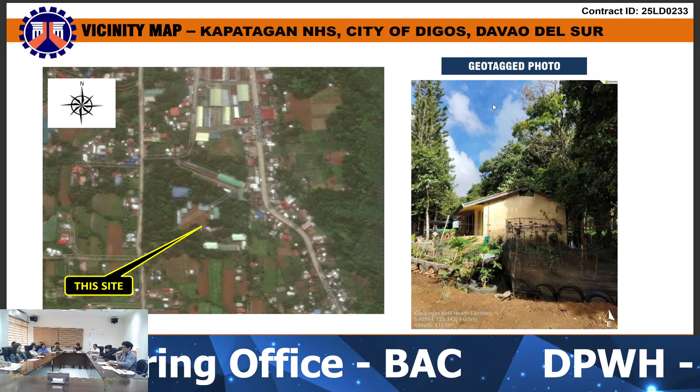Here's our vicinity map shown and site condition. This project includes a school health facility and 2 units of 3-seater toilet detached building.

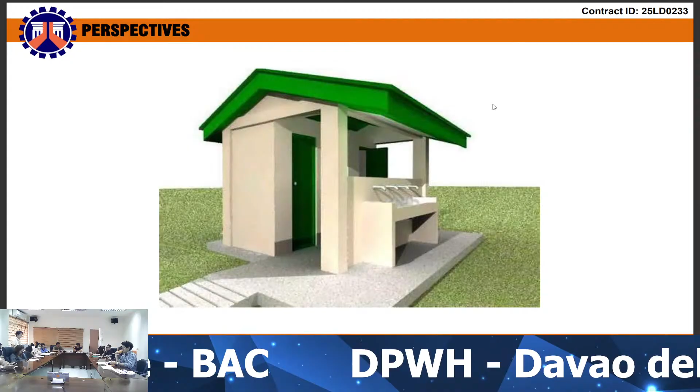For a typical detached 3-seater toilet building, the building has a dimension of 3 by 2.5 meters, which includes a hallway, a toilet room, and a sink or a hand wash. The total floor area is 7.5 square meters. Here's a typical bay section of the building.

Here's our summary of quantities. The project includes the permits, the earthwork, which includes the removal of trees, embankment and gravel fill, reinforced concrete, which includes the 3,000 and the 4,000 PSI structural concrete, the grade 40 and grade 60 reinforcing steel. Under finishing and civil works, we have termite control works, masonry works, fabricated materials such as doors and windows, finishing works such as ceiling, tile works, paint works, roof framing and roofing works. The project also includes plumbing, electrical, and mechanical works.

For our second project, with a contract ID of 25LD0234 and the project title of Construction of School Health Facilities, Molopolo National High School, Kiblawan, Davao del Sur, with an appropriation amount of 5,386,500 pesos and ABC amount of 5,373,000 pesos, a contract duration of 90 calendar days under 2025 EFF.

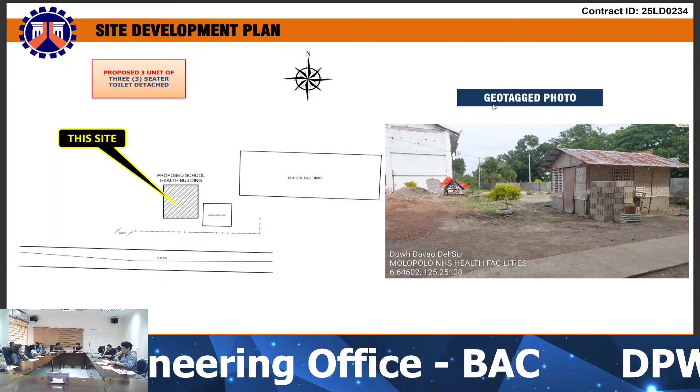The project will be located at Molopolo National High School, Kiblawan. Here's the site condition as well. This project includes the proposed school health facility building and 3 units of 3-seater detached toilet building. The school gave a deed of donation for their proof of ownership.

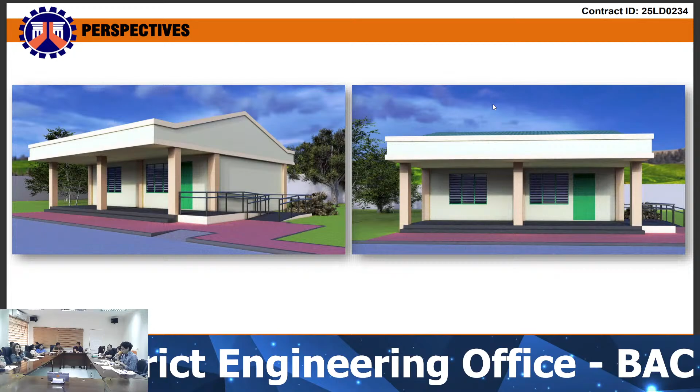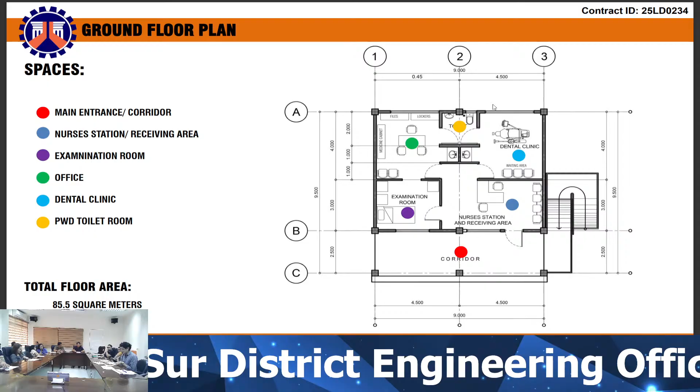Here's the typical perspective of the public school health facility. The typical health facility has a 9 meter by 9.5 meter dimension, or a total floor area of 85.5 square meters, which includes spaces such as the main entrance, the nurse station, the examination room, an office, dental clinic, and a PWD toilet room.

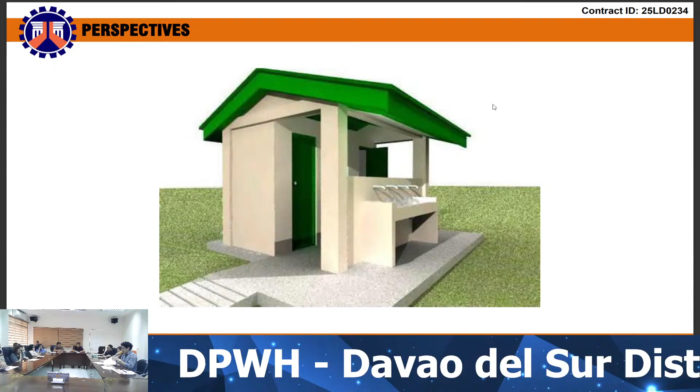For the detached 3-seater toilet building, here's the typical perspective. The building has a dimension of 3 by 2.5 meters, or a total floor area of 7.5 square meters, which includes a 3-seater toilet and a hand wash. Here's the typical bay section of the building.

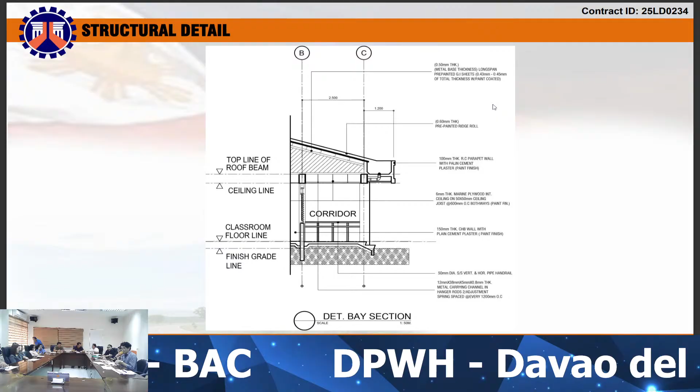Our project includes the following: the permits, the earthwork, which includes the removal of trees, then embankment and gravel fill. Under reinforced concrete, we have the 3,000 and 4,000 PSI structural concrete, and the grade 40 and grade 60 reinforcing steel bars. Under finishing and other civil works, we have termite control works including soil poisoning, masonry works, fabricated materials such as doors and windows, finishing works such as ceiling and tile works, paint works, roof framing and roofing works, plumbing works, electrical and mechanical works.

For 25LD0235, repair and rehabilitation of classrooms, Digos City National High School, City of Digos, Davao del Sur. Appropriation of 13,634,170 pesos and 36 cents. ABC is 13,600,000. Contract duration 270 calendar days.

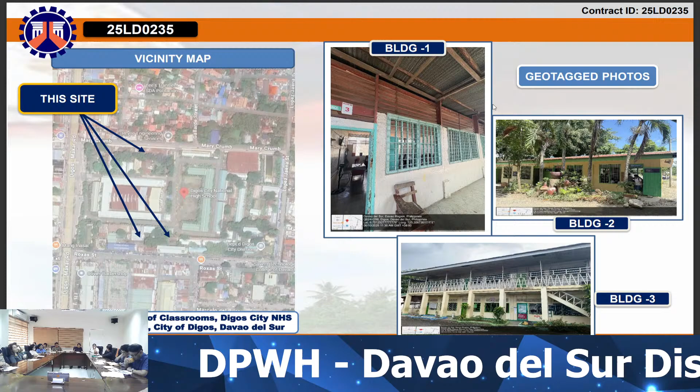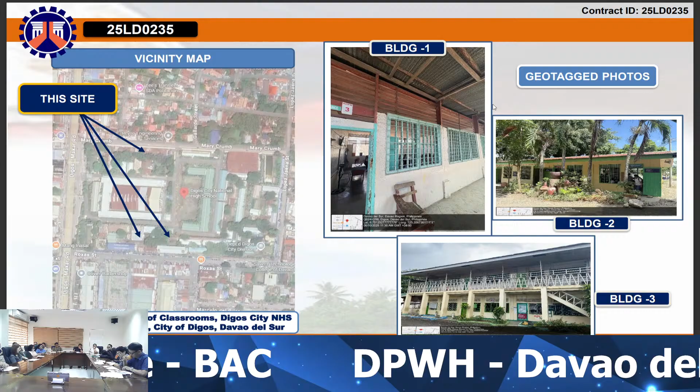We have 3 buildings to be rehabilitated. We have this vicinity map. For building 1, we have 6CL Marcos type building. For building 2, we have this BLSP or the Bagong Lipunan building, 5CL, and a 2-story building, 6CL.

We have the site development plan, the geotagged photo of this project. For building 1, we have the ground floor plan. We have this elevation. For the scope of works for this project, for building 1, Marcos type,

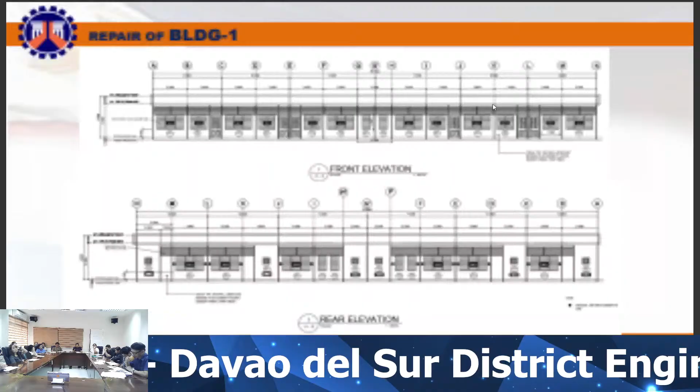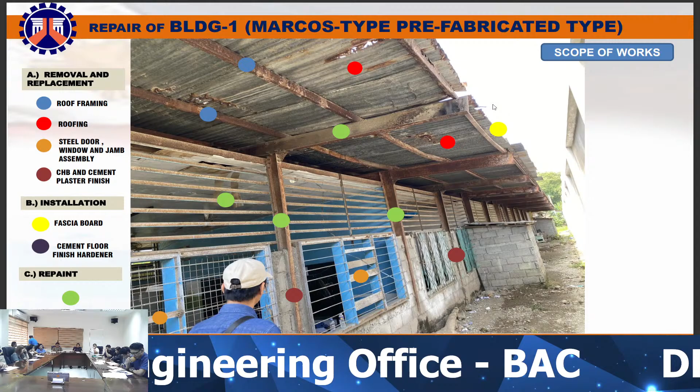first we have removal and replacement of roof framing, roofing, removal and replacement of steel doors and windows, and jamb assembly. We have also the installation of fascia board and cement floor finish hardener. Also, the painting of the structures.

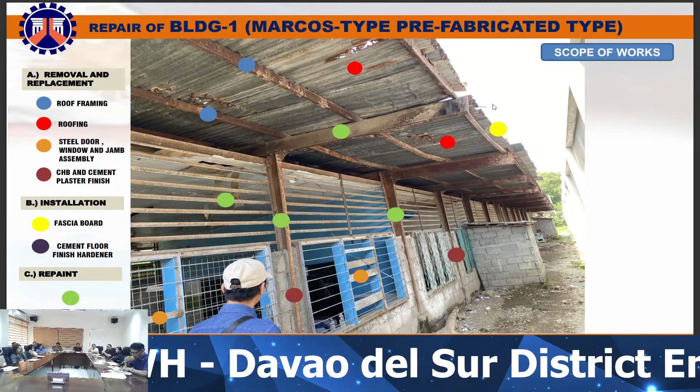We have also the removal or replacement of flashing, the steel door and windows, installation of ceiling at corridor, and installation of reflective insulation.

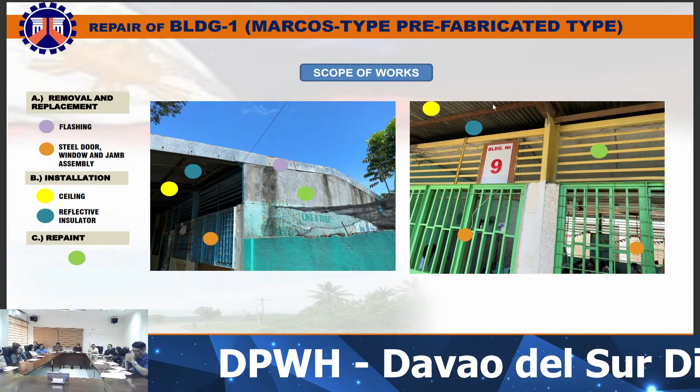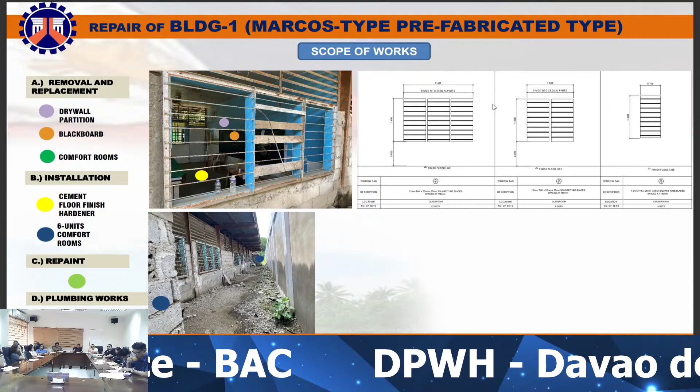Next, we have also removal and replacement of partition walls, the writing board, and comfort rooms. Also installation of 6 units comfort rooms, and the cement floor finish. Also includes the plumbing works and electrical works.

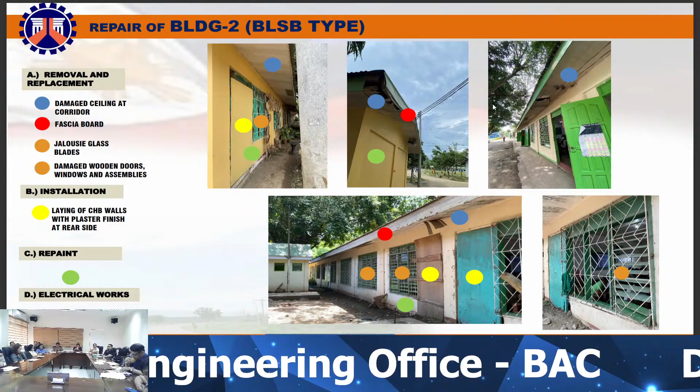Next building, we have this 5CL Bagong Lipunan building. Scope of work: we have the removal and replacement of damaged ceiling at the corridor, replacement of fascia board, replacement of jalousie glass blades, installation of CHB walls at the rear side of the building, repainting of the whole building, and new installation of electrical works.

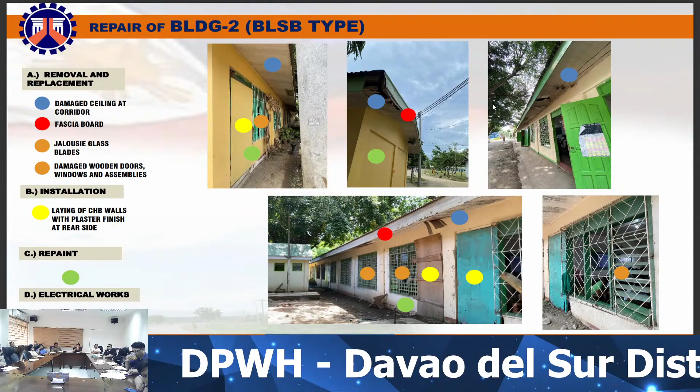We have the floor plan and elevation of the building.

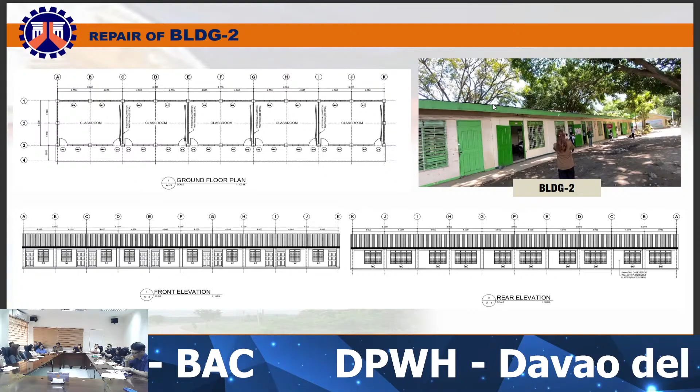Next building, building 3, the 2-story 6CL. We have the existing view of the building. We have the floor plan and elevation.

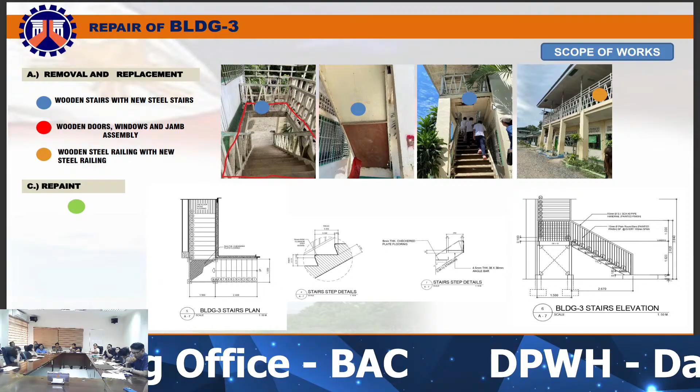For the scope of works of this building, we have the replacement of the roofing and roofing accessories, installation of reflective insulation, removal and replacement of ceiling,

removal and replacement of wood and steel railings into steel railing, installation of wooden partition using fiber cement board, also replacement of jalousie glass blades,

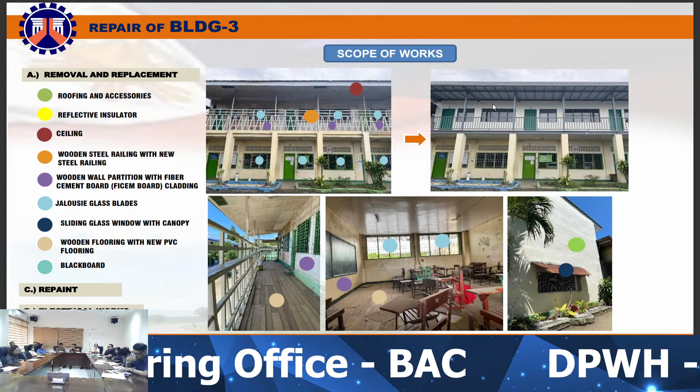also replacement of sliding glass windows with canopy, and removal and installation of wooden flooring into new PVC flooring, and also installation of writing boards. Also repainting of the whole building and replacement of electrical works.

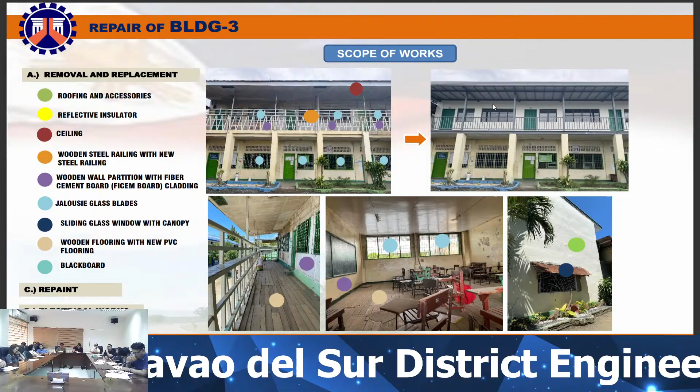Also removal and replacement of wood stairs into steel stairs, and from wooden railing into steel railing. That's all for this project.

Next project, 25LD0236. Repair rehabilitation of classrooms, Ramon Magsaysay Central Elementary School, City of Digos, Davao del Sur. Appropriation of 6,015,075 pesos and 13 cents. ABC, 6 million. Contract duration 120 calendar days under 2025 DEF.

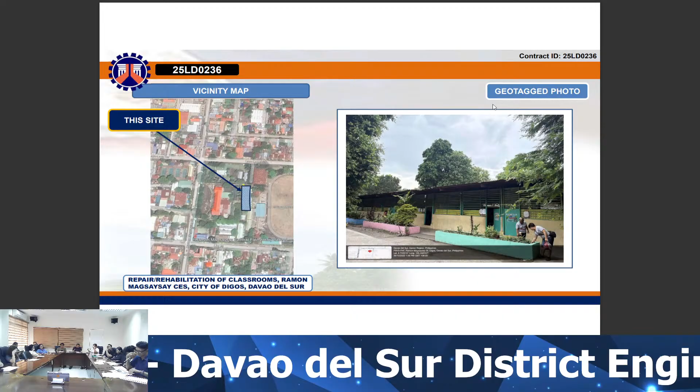We have the vicinity map of this project, the geotagged photo of the existing building. This is a 9 classroom Marcos type school building to be repaired. We have the floor plan. We have the elevation.

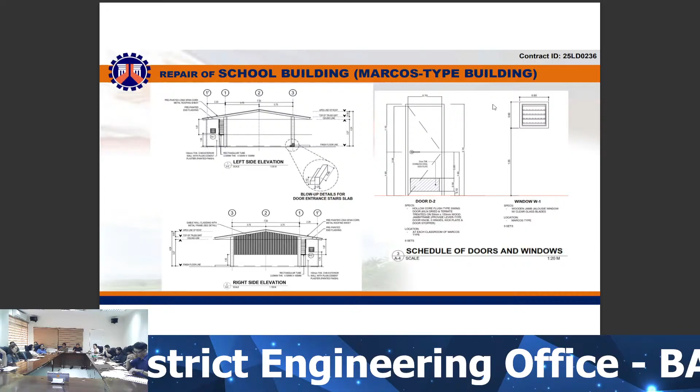We have the projection and schedule of doors and windows. For the scope of works, we have the refurbishment of all comfort rooms and hand wash area of the existing building.

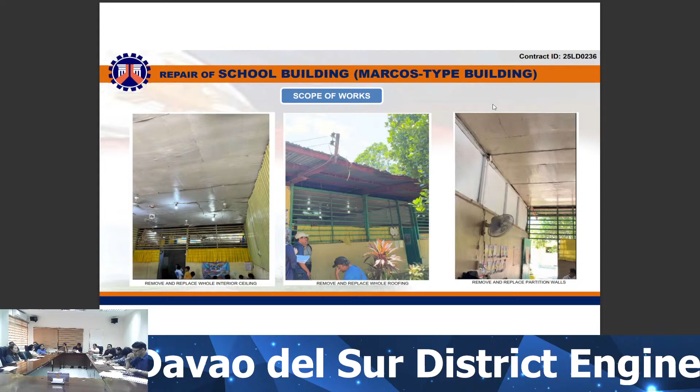Next is the removal and replacement of whole interior ceilings into marine plywood on wooden frames. Also, remove and replace the whole roofing using pre-painted rib-type roofing. Next, we have the removal and replacement of wooden partition walls.

We have the installation of corridor ceiling using marine plywood on wooden frames. Also, removal and replacement of dilapidated wooden purlins into steel C-purlins. Also, removal and replacement of dilapidated wooden rafter in the corridor.

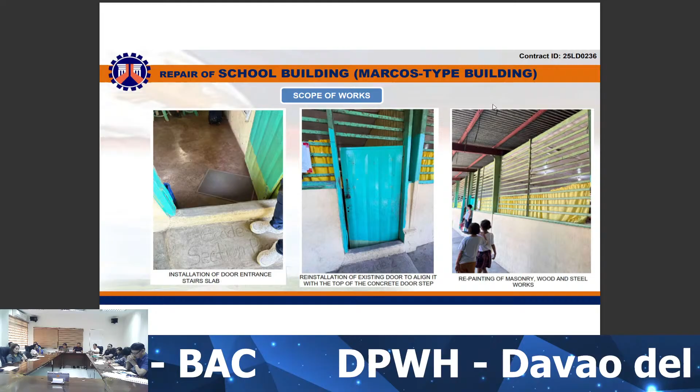Also, we have the installation of this concrete entrance stair slab. Then we have the reinstallation of the existing steel door to align with the top of the concrete door step. We have also the repainting of the whole building.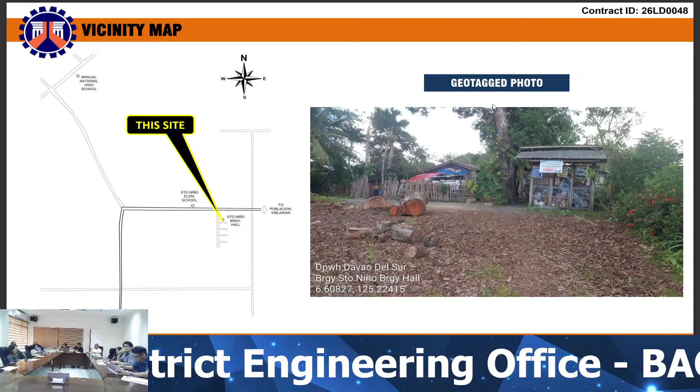Now let's proceed to the civil work projects under the revised 2026 NEP. First, we have the contract ID of 26LD0048 and the project title of Construction of Multi-Purpose Building, Barangay Hall, Barangay Santo Nino, Kiblawan, Davao del Sur, an appropriation amount of 5 million pesos, and the ABC amount of 4,950,000 pesos, the contract duration of 90 calendar days under 2026 NEP. So shown is the vicinity map, which will be located at their barangay site in Santo Nino,

Barangay Hall. Next.

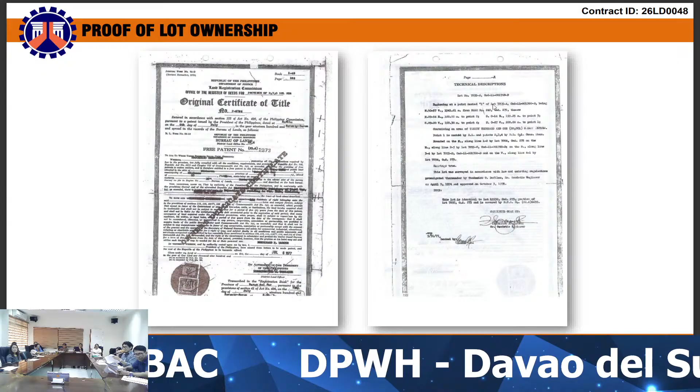The LGU provided an original certificate of title for their lot ownership.

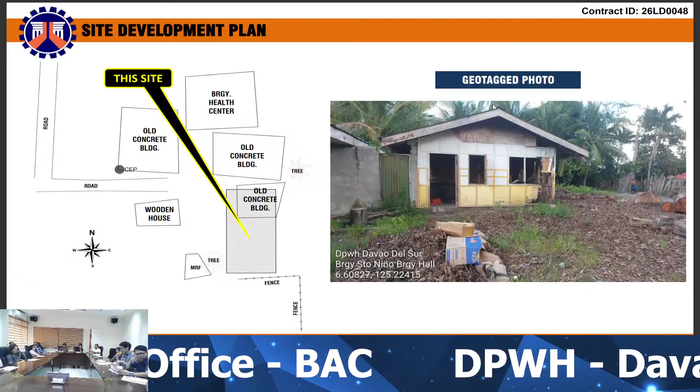Next, here's our site development plan. It should be located near their barangay health center.

The project will be a complete structure, which includes the following. Here's our summary of quantities. Under earthwork, we have the clearing and grubbing, the individual removal of trees, and embankment.

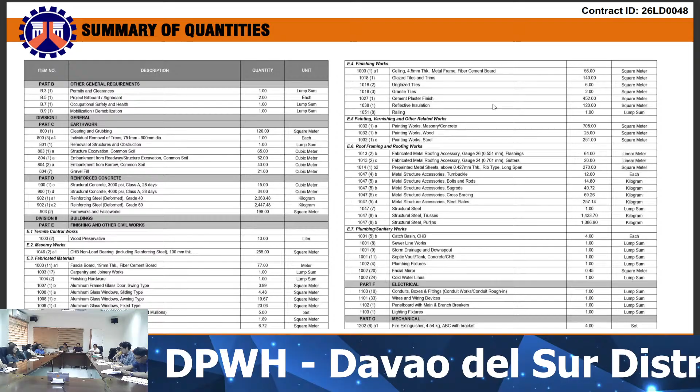Then for reinforced concrete, we have the 3,000 and 4,000 PSI structural concrete and grade 40, grade 60 reinforcing steel. Under finishing and other civil works, we have termite control works, masonry works, fabricated materials such as doors and windows, finishing works such as ceiling and tile works, paint works, roof framing and roofing works, plumbing works, then electrical and mechanical works.

You may review these details in the uploaded version of the live broadcast.

Next project, we have contract ID 26LD0049, project title Construction of Multi-Purpose Building, Barangay Hall, Barangay Bonifacio, Kiblawan, Davao del Sur, an appropriation amount of 5 million pesos and an ABC amount of 4,950,000 pesos, with a contract duration of 90 calendar days under 2026 NEP.

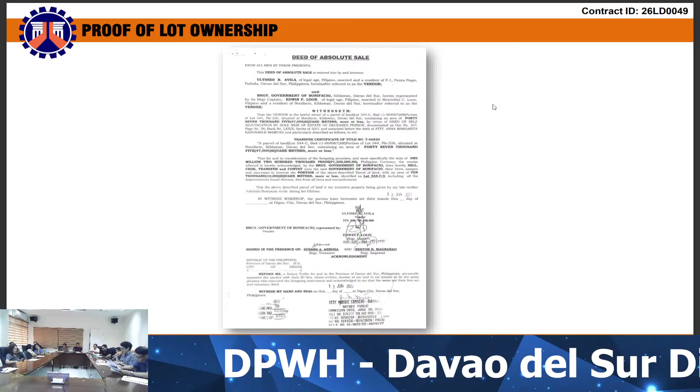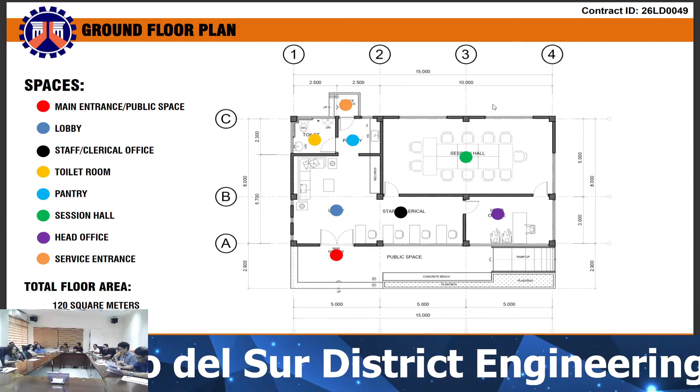The typical plan is a 15 by 8 meter building, or total floor area of 120 square meters. Spaces included are the following: the main entrance, the lobby, the staff and clerical office, toilet room, pantry, session hall, head office, and the service entrance at the back.

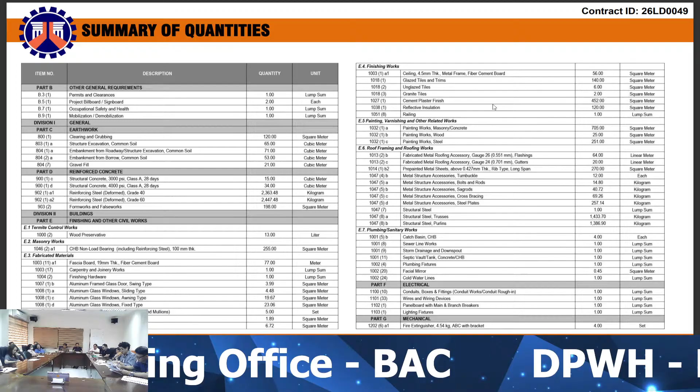Here's our summary of quantities, still the same typical barangay hall building, same scope of work. You may review these details after the uploaded live broadcast.

Next, contract ID 26LD0050, project title Construction of Multi-Purpose Building, Barangay Hall, Barangay Bagumbayan, Kiblawan, Davao del Sur, with appropriation amount of 5 million pesos, an ABC amount of 4,950,000 pesos, contract duration of 90 calendar days under the revised 2026 NEP.

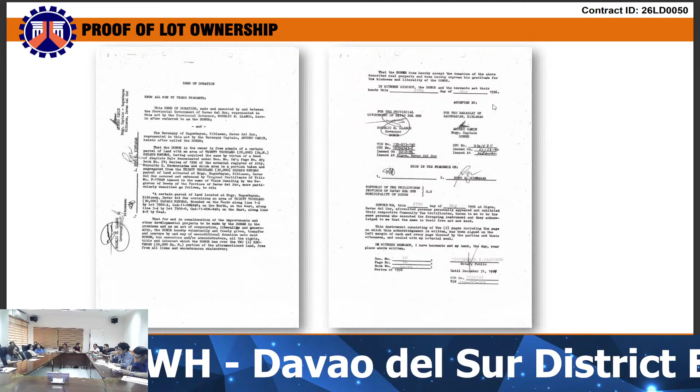Next, the building will be located near their health center. Here's another photo of the site.

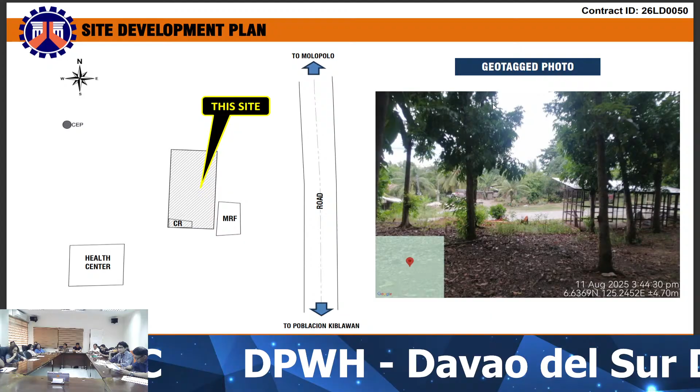Contract ID 26LD0058, project title Construction of Multi-Purpose Building, Evacuation Center, Barangay Poblacion, Kiblawan, Davao del Sur, with appropriation amount of 5 million pesos, and an ABC amount of 4,950,000 pesos, contract duration of 90 calendar days under revised 2026 NEP.

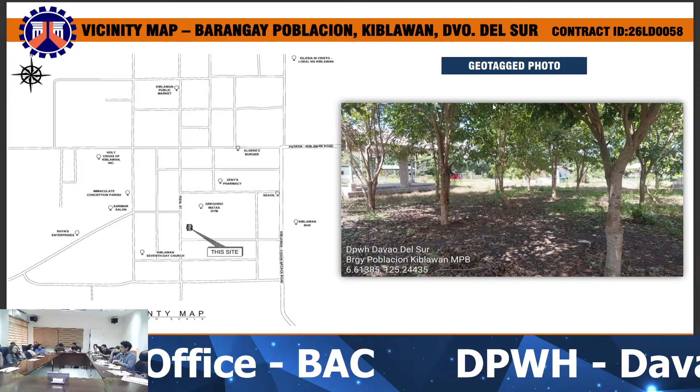Next, here's our vicinity map, located at Barangay Poblacion, Kiblawan, and our site condition. Here's our site development plan and our typical perspective of the evacuation center building.

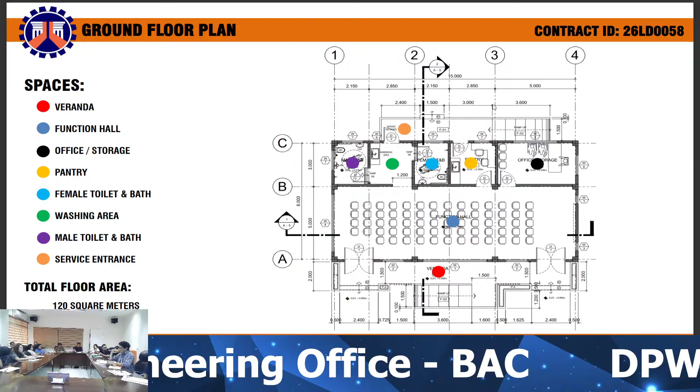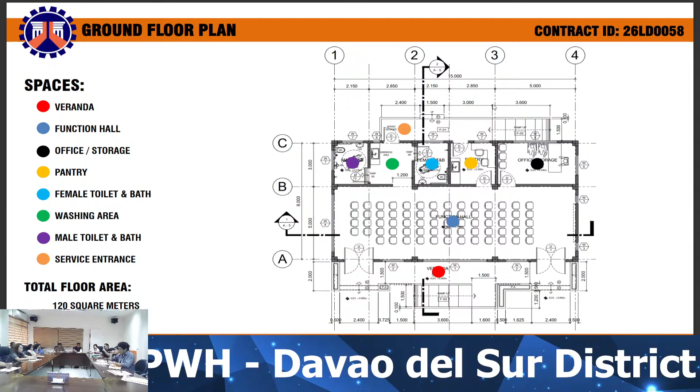Our building has a dimension of 15 by 8 meters, or total floor area of 120 square meters. Spaces included are the following: veranda, function hall, office or storage, pantry, female and male toilet and bath, washing area, and service entrance at the back. The building will mainly be composed of steel trusses and reinforced concrete columns and beams.

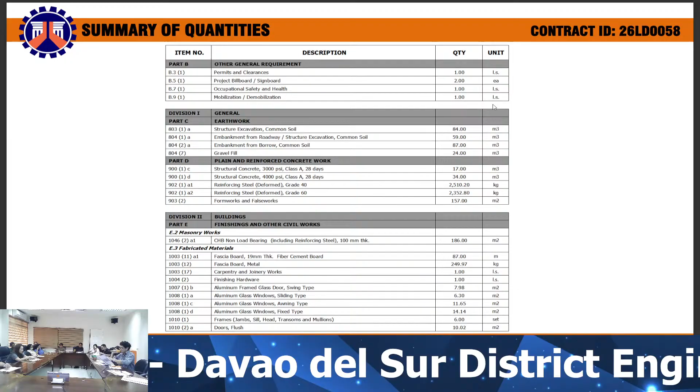The LGU provided an original certificate of title for their ownership. Here's our summary of quantities, which includes the following: the permits, the earthwork, excavation and embankment, under plain and reinforced concrete work.

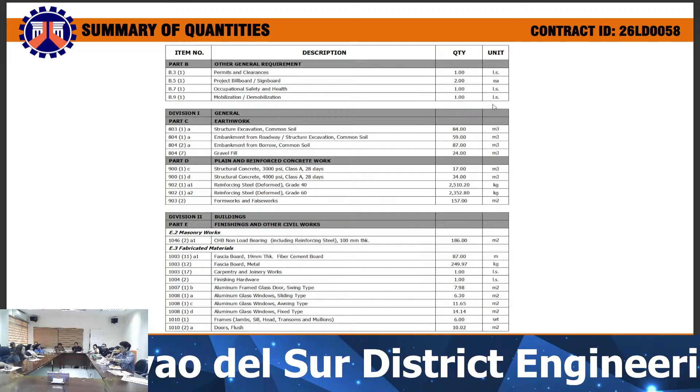We have the 3,000 and 4,000 PSI structural concrete and grade 40 and grade 60 reinforcing steel. Then under finishing and other civil works, we have masonry works, fabricated materials, finishing works which include tile works and ceiling, paint works, roof framing and roofing works, plumbing works, and electrical works.

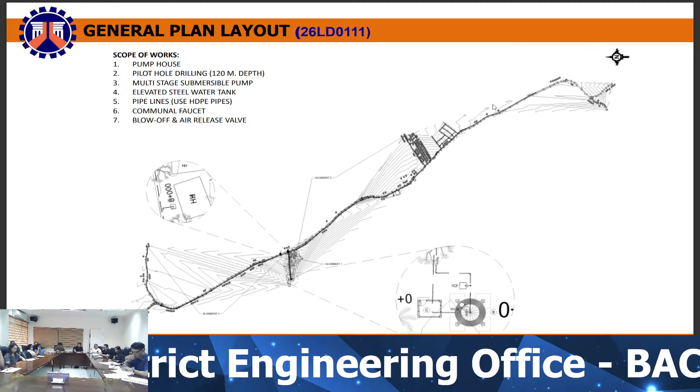We have the scope of works, which includes the construction of pump house, pilot hole drilling up to 120 meter depth, the installation of multi-stage submersible pump, construction of elevated steel water tank, installation of pipelines using HDPE pipes, installation of communal faucet, and blow-off and release valve.

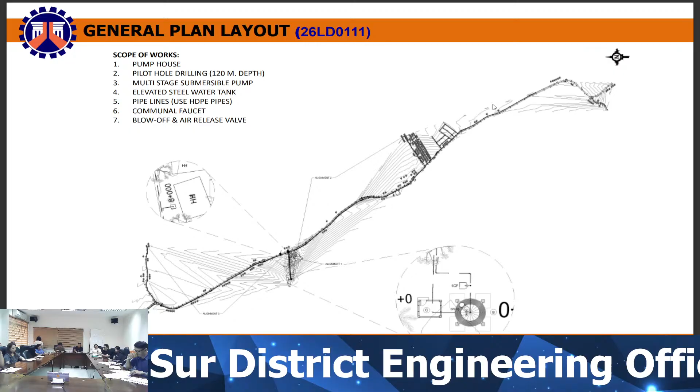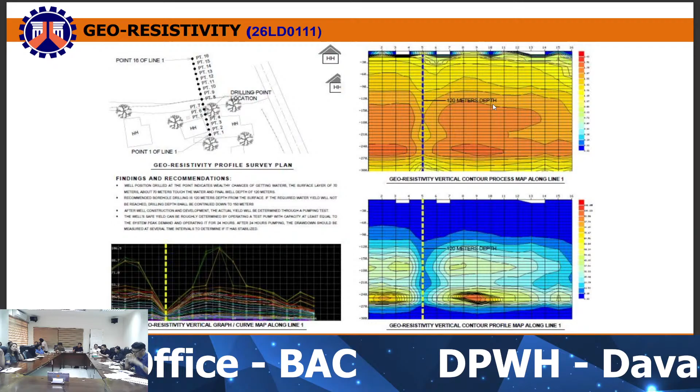We have the result of the georesistivity survey to determine the drilling site. We chose the well position at point number 5, which indicates a high chance of getting water.

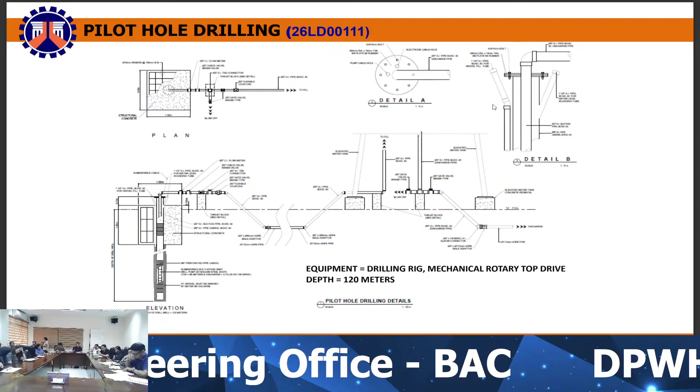Next, we have these details of the pilot hole drilling using an equipment of drilling rig, mechanical rotary.

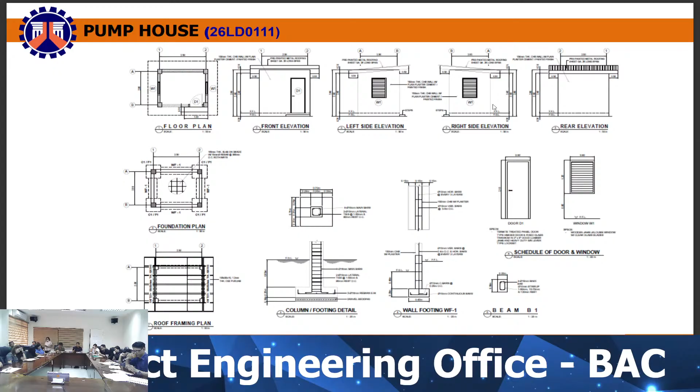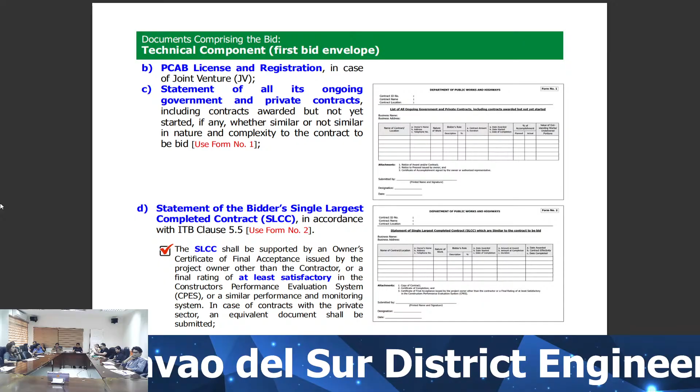Next, PCAB license and registration in case of joint venture. Next is the statement of all its ongoing government and private contracts, including contracts awarded but not yet started, using Form Number 1. Next is the statement of the bidder's single largest completed contract, or the SLCC.

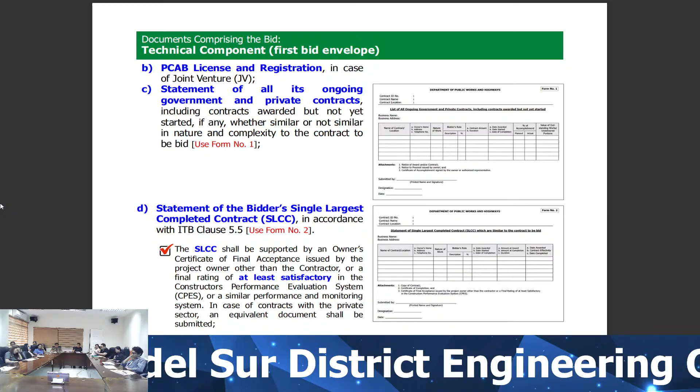SLCC shall be supported by an owner's certificate of final acceptance issued by the project owner other than the contractor, or final rating of at least satisfactory in the CPES, using Form Number 2. Next, the bidder must have completed an SLCC similar to the procurement project to be bid, and whose value must be equivalent to at least 50% of the ABC.

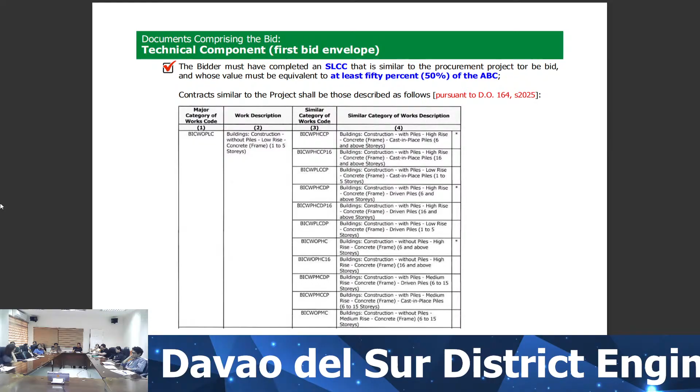Contract similar to the project, as shown on the screen, and also reflected on the bid data sheet, ITB clause 5.4. Next, the net financial contracting capacity, or the NFCC computation. Computation shall be based on financial data submitted to the BIR through electronic filing and payment system, supported by the latest audited financial statement, duly stamped and received by the BIR. The NFCC must be at least equal to the ABC to be bid.

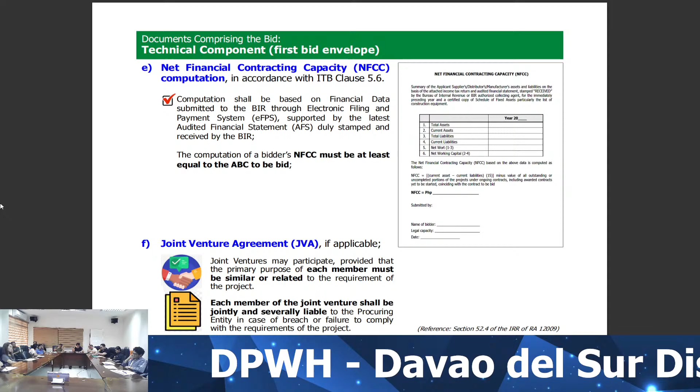Next is the joint venture agreement, if applicable. Joint ventures may participate provided that the primary purpose of each member must be similar or related to the requirement of the project. Each member of the joint venture shall be jointly and severally liable to the procuring entity in case of breach or failure to comply with the requirements of the project.

Next is the bid security. The bid security shall be in the form of a bid securing declaration or any of the following. If bid security is in cash, the amount shall not be less than 2% of ABC. If bid security is in surety bond, the amount shall not be less than 5% of ABC. The validity period shall be 120 calendar days from bid opening.

For the bid securing declaration form, we have a new format, the new standard form issued by the GPPB TSO.

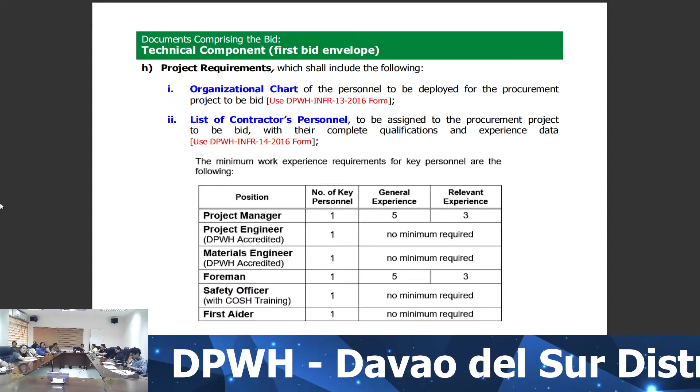Next, project requirements, which shall include the following. First is the organizational chart, using form DPWH-INFR-13-2016.

Next is the list of the contractor's key personnel to be assigned to the procurement project to be bid, with their complete qualifications and experience data. Use form DPWH-INFR-14-2016. Shown on the screen are the minimum work experience requirements for the key personnel.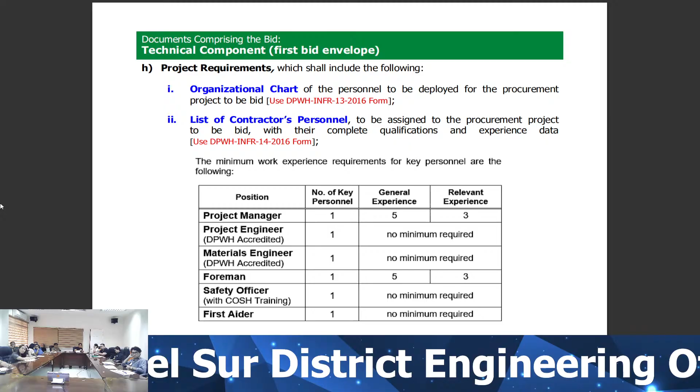The experience means total years of civil works experience of any nature in construction and engineering consultancy services. Key personnel, particularly the project manager, project engineer, and materials engineer, must be different persons.

Key personnel should include the following data or information: name of personnel, PRC license number and expiry date, date of birth, contact number, and tax identification number.

Also, an accredited safety officer is required upon issuance of NOA, and a first aider with certificate of training issued by Red Cross in compliance with DOLE requirements, required upon issuance of notice of award.

Next, the bidder should also comply with DPWH 252 series of 2025, which is the revised implementing rules and regulations of RA 11058, entitled An Act Strengthening Compliance with Occupational Safety and Health Standards and Providing Penalties for Violations thereof.

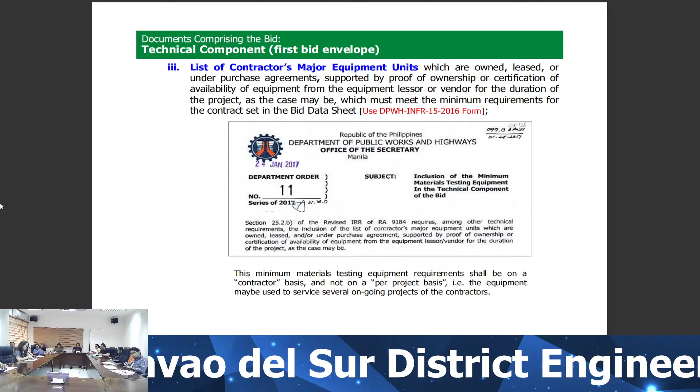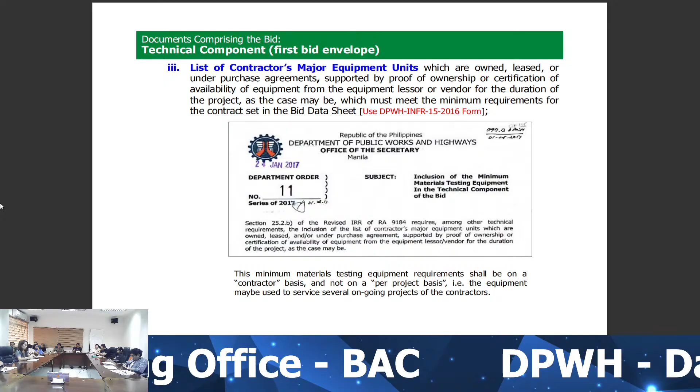Next, the list of the contractor's major equipment units, which are owned, leased, or under purchase agreements, supported by proof of ownership or certification of availability of the equipment from the equipment lessor or vendor for the duration of the project, which must meet the minimum requirements for the contract set in the bid data sheet. Use form DPWH 15/2016, and the inclusion of minimum materials testing equipment as per DO 11 series of 2017.

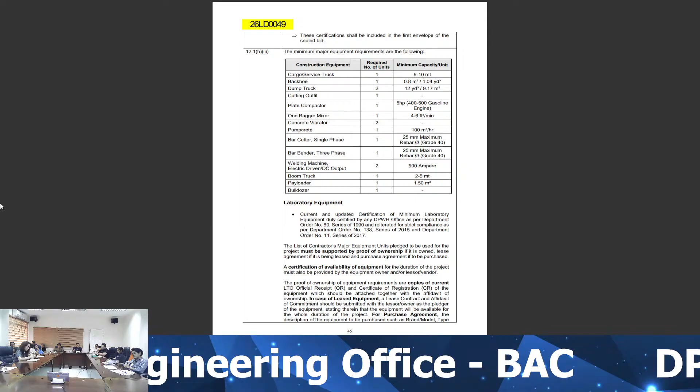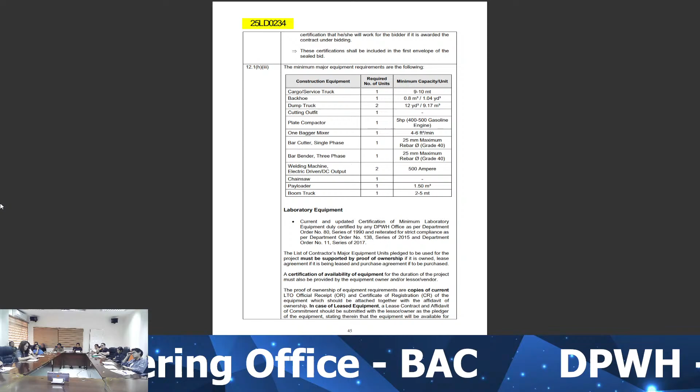Next, as shown on the screen, the minimum construction equipment requirements for 26 LD 0048, for 26 LD 0049, for 26 LD 0050, for 26 LD 0058, for 26 LD 0111, for 25 LD 0233, for 25 LD 0234, for 25 LD 0235, and for 25 LD 0236.

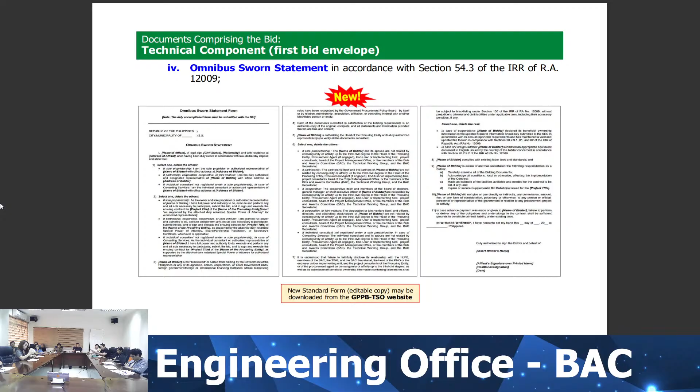Next requirement is the omnibus sworn statement in accordance with section 54.3 of the IRR. For the new format, the new standard form may be downloaded from the GPPB website.

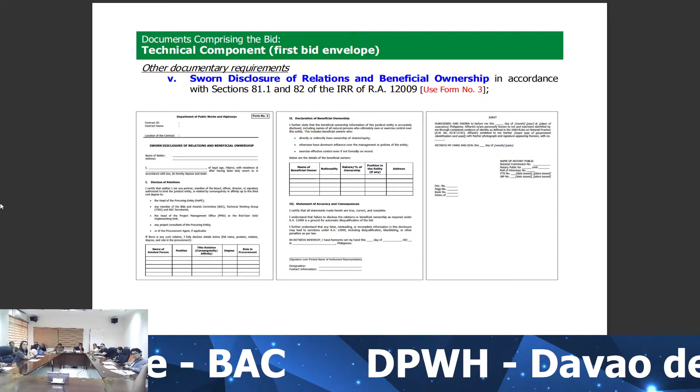For the financial component, which is the second bid envelope, first is the financial bid form. Next is the bid prices in the bill of quantities. Next is the detailed estimates, including a summary sheet indicating the unit prices of construction materials, labor rates, and equipment rentals used in coming up with the bid. And the last one is the cash flow by quarter. Use form DPWH Infra-19/2016.

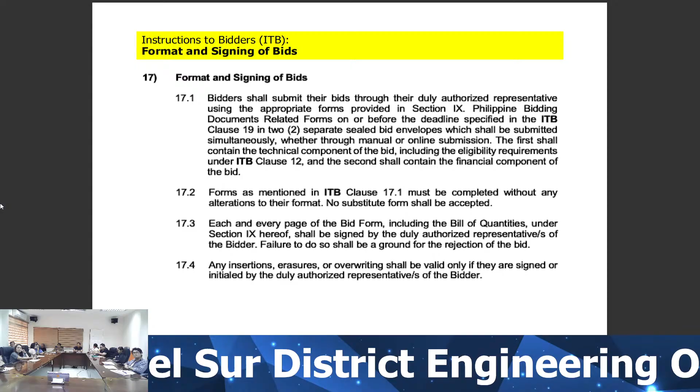For the format and signing of bids, bidders shall submit their bids through their duly authorized representative using the appropriate forms provided in the bidding documents on or before the deadline, in two separate sealed bid envelopes which shall be submitted simultaneously, whether through manual or online submission. The first bid envelope shall contain the technical component of the bid, including the eligibility requirements, and the second bid envelope shall contain the financial component of the bid.

Forms, as mentioned in instruction to bidders clause 17.1, must be completed without any alterations to their format. No substitute form shall be accepted. Each and every page of the bid form, including the bill of quantities, shall be signed by the duly authorized representative of the bidder. Failure to do so shall be a ground for the rejection of the bid.

Any insertions, erasures, or overwriting shall be valid only if they are signed or initialed by the duly authorized representative of the bidder.

Next is for the sealing and marking of bids. Bidders shall enclose their technical documents, as described in instruction to bidders, in one sealed envelope marked as technical component, and the financial component in another sealed envelope marked as financial component, sealing them all in an outer envelope marked as bid.

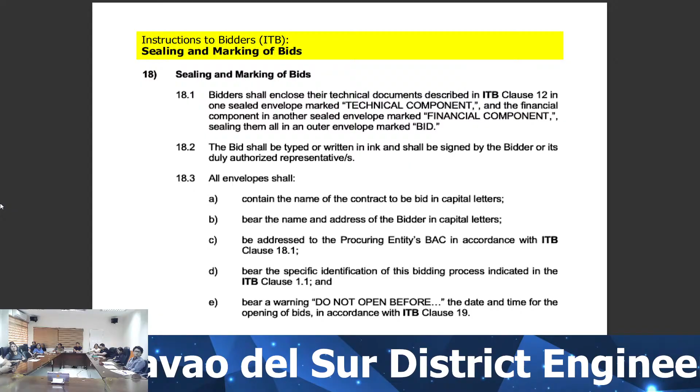The bid shall be typed or written in ink and shall be signed by the bidder or its duly authorized representative. All envelopes shall contain the name of the contract being bid in capital letters, bear the name and address of the bidder in capital letters, be addressed to the procuring entity's bids and awards committee, bear the specific identification of the bidding process, and bear a warning, do not open before the date and time for the opening of bids, in accordance with instructions to bidders clause 19.

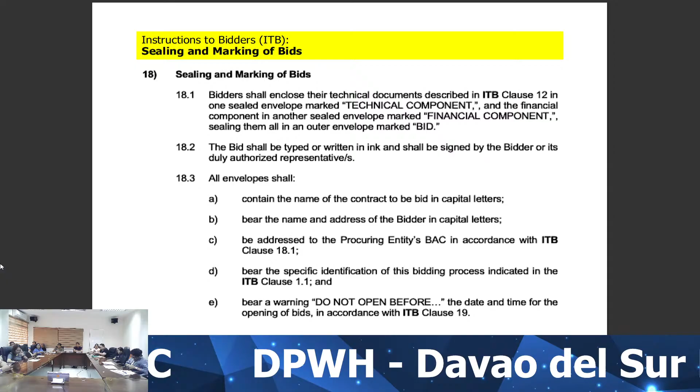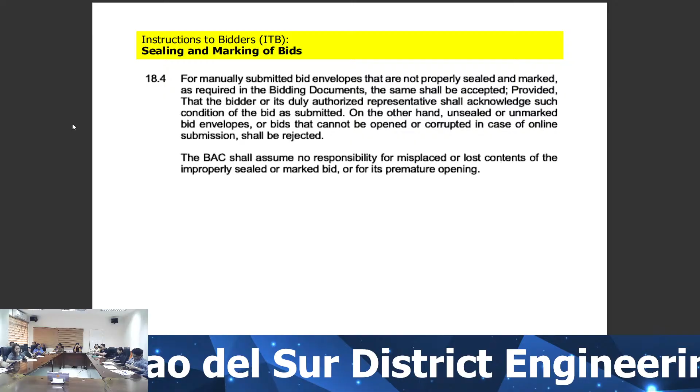For manually submitted bid envelopes that are not properly sealed and marked, the same shall be accepted, provided the bidder or its duly authorized representative acknowledges such condition of the bid as submitted. On the other hand, unsealed or unmarked bid envelopes, or bids that cannot be opened or are corrupted in case of online submission, shall be rejected. The BAC shall assume no responsibility for misplaced or lost contents of the improperly sealed or marked bid, or for its premature opening.

For the submission and receipt of bids, bid submission may be done manually or electronically. However, bidders should only select one mode of submission, either manual or electronic. For bids submitted manually, bids must be duly received by the BAC Secretariat on or before the scheduled date. For bids to be submitted online, bidders should observe the guidelines for electronic submission and receipt of bids as per DO 87 series of 2020, and the procuring entity's email address is electronicbids_DavaodelSur@dpwh.gov.ph. Bids submitted after the deadline shall not be accepted.

For the eligibility criteria, it shall be in accordance with Section 52.4.2 of the IRR of RA 12009. Eligibility evaluation for the procurement of locally funded civil works contracts shall be conducted electronically using the Civil Works Registry, as per DO 64 series of 2012. Contractors who wish to participate in the bidding are encouraged to enroll in the DPWH Civil Works application at the Procurement Service, fifth floor, DPWH Building, Bonifacio Drive, Port Area, Manila, while those already enrolled shall keep their records current and updated.

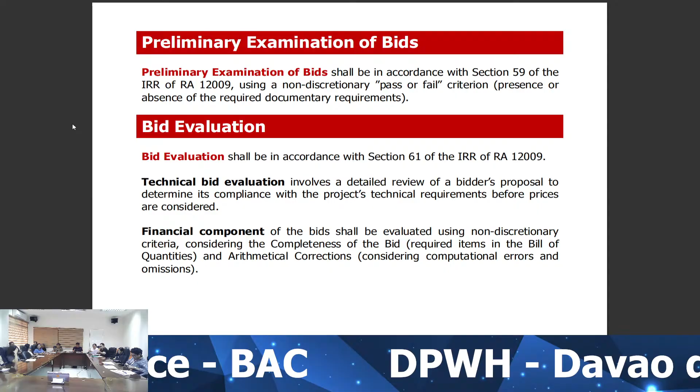For post-qualification, it shall be in accordance with Section 63 of the IRR of RA 12009. It involves verifying, validating, and ascertaining all the statements made and documents submitted by the bidder with the lowest calculated bid, or LCB, to ensure that the winning bidder can fulfill the contract, including their compliance with laws, financial capacity, and technical competence and experience.

For the awarded contract, it shall be in accordance with Section 69 of the IRR of RA 12009. The award is made to the bidder with the lowest calculated and responsive bid, or LCRB.